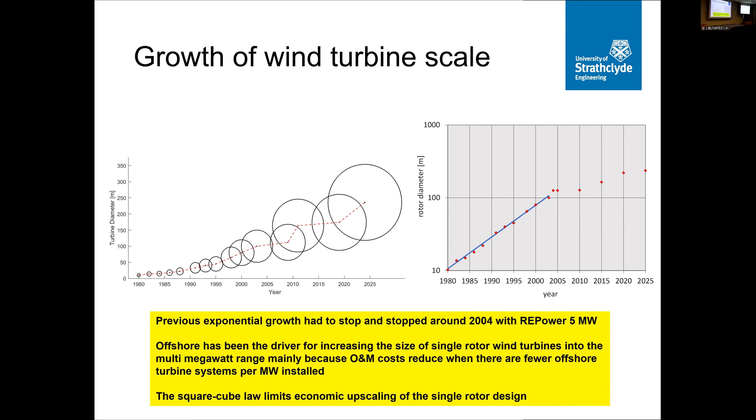For most European machines on land, tip speeds were restricted around 60, 65 meters per second. Then with the advent of variable speed technology, which could manage noise by reducing speed in certain wind conditions, somewhat higher tip speeds, 70 or 80 meters per second, were employed.

The faster the machine runs, the lower the torque at a given power, and the less weight and cost in the drivetrain. We see a pattern with offshore machines where tip speeds have increased into the 90 meters per second range and perhaps a little above. This is advantageous for the economics of the turbine. It could be pushed further to values like 120 meters per second, but I think there is still some concern about blade erosion and the implications for maintenance.

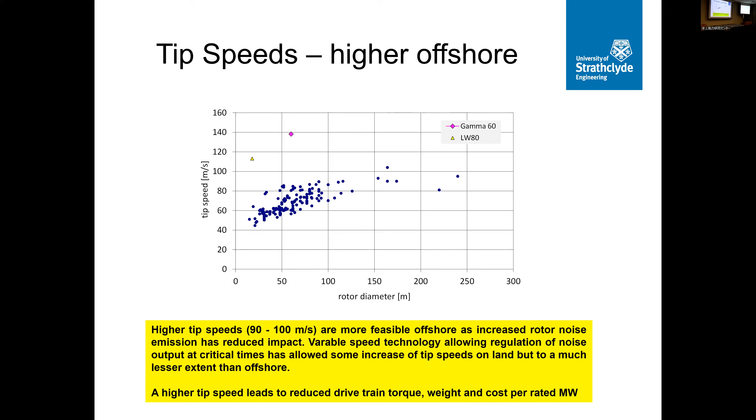Another pattern in offshore machines is reduced power density, which is equivalent to a relatively larger diameter in relation to the rated power of the machine. The whole logic of how much power you extract from a machine of a given size is really about the ratio of the value of energy from the rotor and the costs incurred by rotor loads, and in particular by the electrical transmission system. The cost of the transmission system is much greater offshore, and the cost of rotors in terms of lifetime cost is rather less, and this justifies larger rotors. So we see an average power density on land of around 400 watts per meter squared, reducing offshore to values like 350, 320 - a general pattern for offshore turbines.

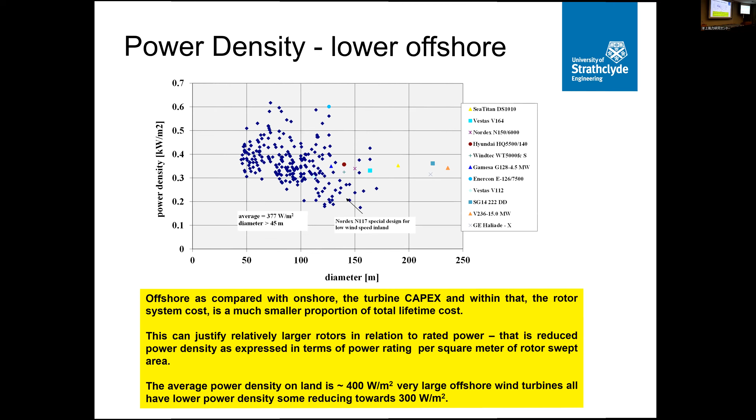Aerodynamic research has been active since the beginning of the modern wind industry in 1980 and continues. It might have been thought that with mature industries in aircraft, both civil and military, there would be enough done on airfoil development. But in fact, the specification of wind turbines is different.

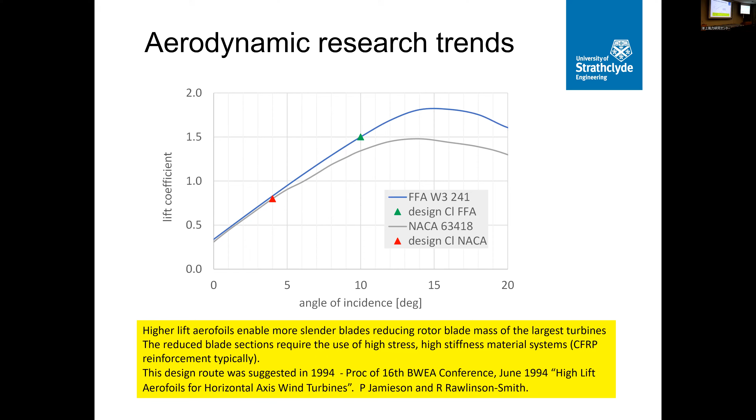Stall is sometimes useful in limiting loads. For lighter, very large rotors, sections with higher lift are advantageous, to avoid the rotor blade sections being too big near the root. So in summary, the development of aerofoil sections has been active and remains active in research.

If you look at the largest machines around, the permanent magnet design of generator seems to be quite dominant.

There have been considerable concerns in recent years about the supply of rare earth magnets. And some manufacturers like Siemens, although they use permanent magnets in their biggest machines, are avoiding them in smaller machines. And even a Chinese manufacturer like Goldwind is considering systems with gearing, which is not usually a high-speed generator, but systems that reduce the quantity of magnet material.

There's also competition with electric vehicles for some of the components of the rare earth magnets, such as dysprosium, which is useful for the cooling of the generator.

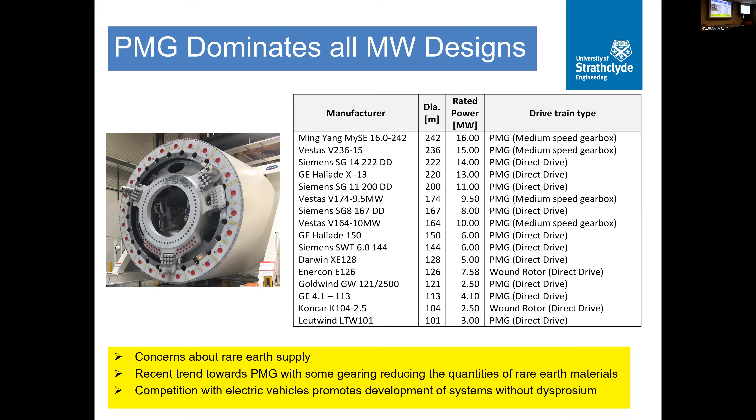The attraction of the permanent magnet design is in the comparative simplicity of the generator, avoiding geared systems in the direct drive solutions. This is a particularly innovative solution which achieves the gearing magnetically without lubrication.

And we have a conflict here because these designs with the permanent magnets are among the most efficient, especially at lower part loads. At the same time, there's concern about permanent magnet supply worldwide, especially because of the Chinese stranglehold on the market.

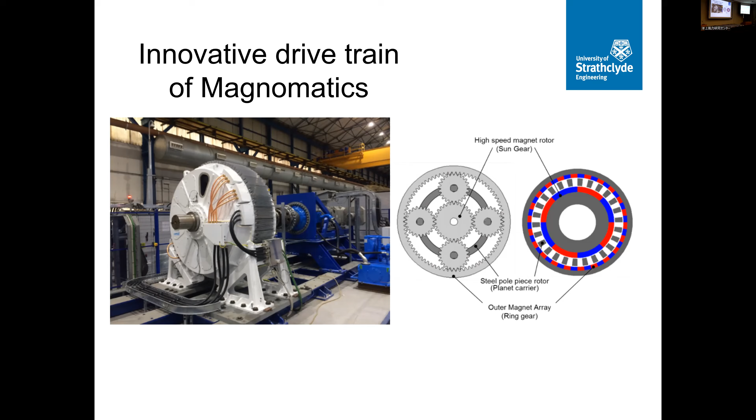There are a huge number of innovative wind turbine designs. My connection with Kyushu University, which has been over 10 years, started with an invitation from Professor Yoshida, and very quickly I realized we had a lot of common interest with the research that Professor Ohya was conducting. The wind lens ducted rotor developed at Kyushu is, in my opinion, one of the most effective designs. I think the combination of an expansion area and a brim leads to a compact rotor, and I believe this is the best way to go with that type of design.

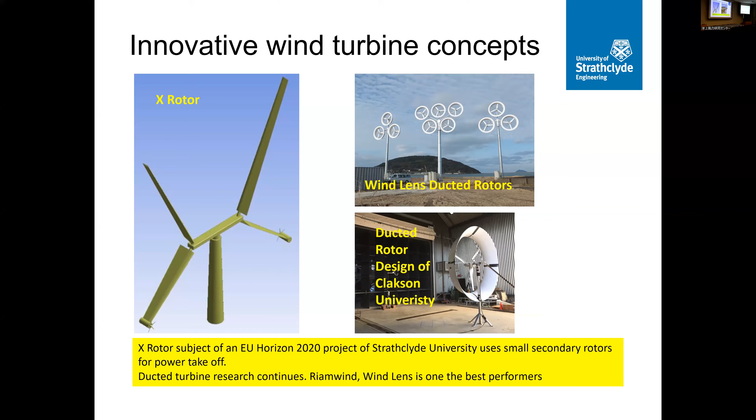If you look at the research papers published today, it's very obvious that over the past 20 years, no surprise to anyone, there has been very strong growth of interest in offshore. And offshore, although it's still a relatively small proportion of the total installed capacity in the world, is the area of greatest growth in research. And within offshore, floating systems is also showing the greatest growth. So this reinforces the relevance of the work that is going to be undertaken at the new center in Kyushu.

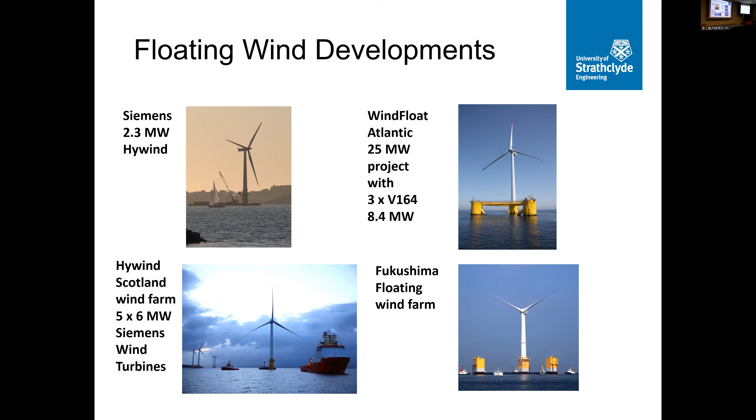We now have floating projects and floating wind farms. I won't say much about this, especially at Fukushima - you will know a great deal more than I do. But the development is now seriously underway.

For that technology, I draw attention to some key areas in the floater design. The semi-submersible design is definitely dominating the market at the moment, but I believe the key to the most effective design is to integrate the floater with the wind turbine structure.

And also there are new concepts for floaters which involve suspending the ballast mass rather than directly filling elements of the structure. I'm not an expert in hydrodynamics, but it seems to me that this is a very active research area and is going to be important for getting costs down.

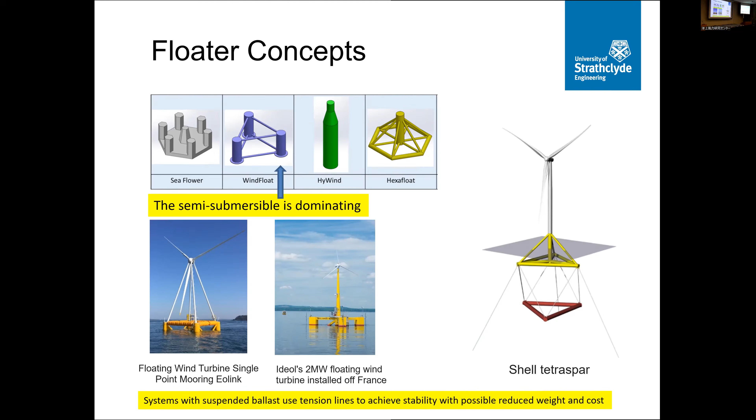What I would like to emphasize is that when I started, especially looking at innovation for the UK government in the 1990s, rather than simply look at some ideas and try and compare them, I asked myself the question: what is the basis of effective innovation? What is the logic of systems that will really reduce the cost of energy? Two things were very noticeable. One, that there's a mismatch between energy production, which comes in moderate and light winds predominantly, and the cost in a wind turbine, which is driven by defending the turbine in the higher wind speeds and in extreme wind speeds, in the case of Japan, typhoon conditions.

The other area is a simple observation that the value of a wind turbine is in the area exposed to the wind - that's the source of the energy. Everything you do to support that area and to extract the power is producing cost. So the ratio of area to cost is a key parameter, and increasing that is a design principle for innovation.

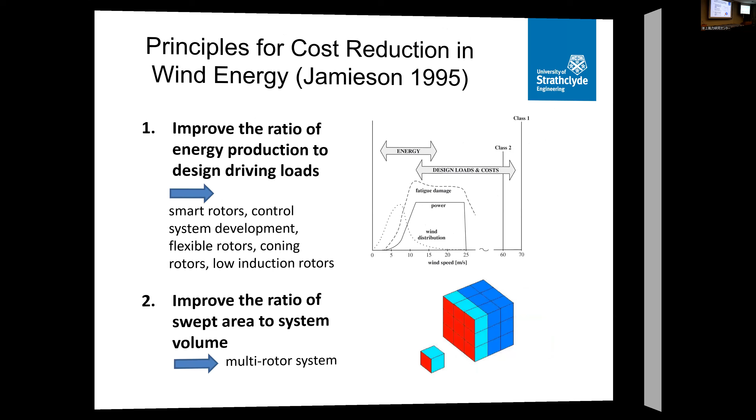This led me to the multi-rotor system. You can have systems with a few turbines, like the Aerodyn turbine, which the twin turbines are producing 15 megawatts. It's a very nice design, and the integration of the structure for the twin turbines with the floater leads to a light and promising design, promising to be low cost.

The systems with a large number of rotors are different in character. They really exploit the benefit of having a large area but a small volume of rotor nacelle assembly materials and cost. So there are huge CAPEX savings in what is normally a major cost element of the wind turbine, the rotor and the drivetrain. But perhaps even more important is the possibility for standardization.

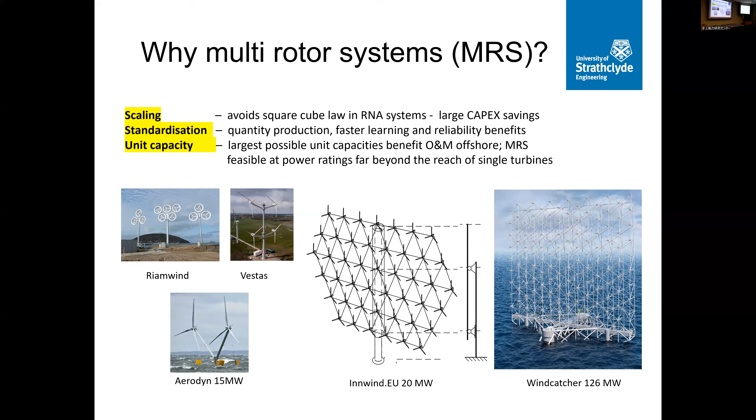It's conceived of as a floating system. I was not directly involved in the design of this system, but I was involved in design review and evaluation and guidance on the design.

There are two options basically for the yawing of the thing. One is to have a turret, a moored turret, and the system can rotate around it. The other possibility is that it can simply yaw, taking up a downwind attitude by drift on catenary lines. This means that you avoid the need for any specific and potentially expensive mechanism to enable the yawing of the system.

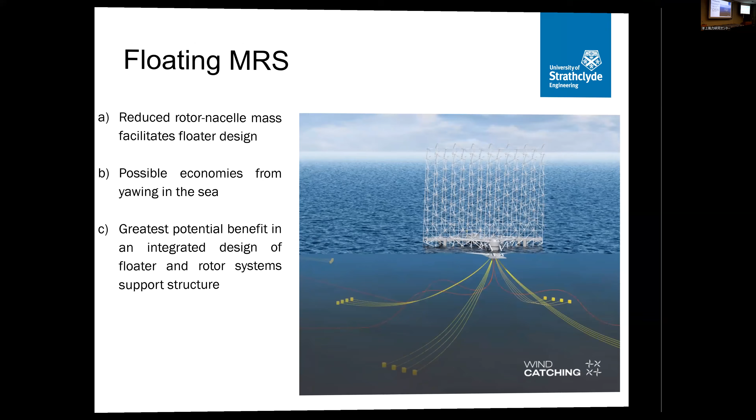I have recently been involved with the European team on the development of a multi-rotor system based on vertical turbines.

I don't have time to explain all the logic of this, but the vertical turbines, which are normally less efficient than horizontal turbines, in a blockage situation side by side can generate extra power. If they're high aspect ratio with long blades, you mitigate tip loss. They're naturally supported in a rectangular structure, which is good for maintenance and so forth.

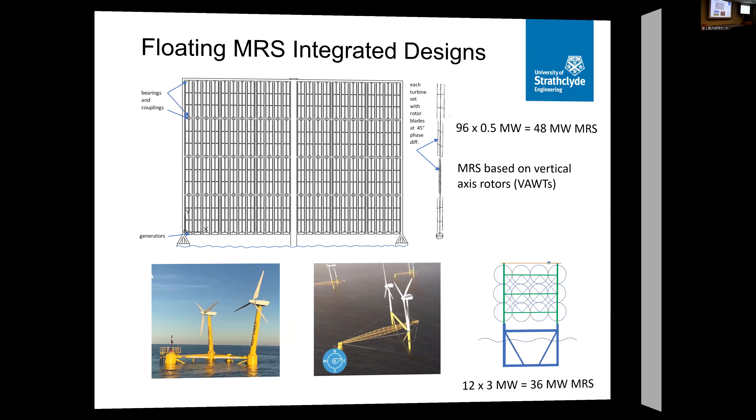If there is any issue regarding conventional turbines and particularly multi-rotor turbines offshore, the one above all that is of critical importance is the operation and maintenance. It's a higher proportion of costs offshore.

And particularly at Strathclyde University, for the multi-rotors, we have been developing detailed modelling. And I have done some work for leading manufacturers such as Siemens, and it appears the key is the management of minor faults.

In multi-rotor systems with small turbines, you can have efficient systems for handling the turbines, avoiding the use of jack-up vessels. But it's very important with a lot of turbines that you can deal efficiently with minor faults, or avoid them by introducing extra redundancies or more reliable components.

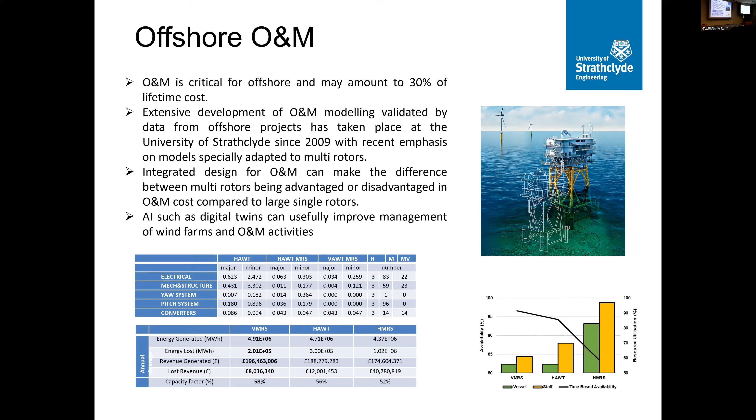There are now a number of projects looking at offshore hydrogen production. There seems to be some consensus that the optimum solution will be to produce the hydrogen locally offshore rather than transmit electricity to electrolyzers based on land.

The projects in Europe are very naturally looking at the detailed design of electrolyzers and all the necessary equipment, and how costs can be reduced.

I would add to that a simple observation that if you can decouple the production of energy from electricity demand by having a storage medium such as hydrogen, then the same amount of energy can be produced by a much smaller generator with a larger rotor.

We see here a large number of institutions, some involved in prototype manufacture, some in research around the world looking at airborne systems.

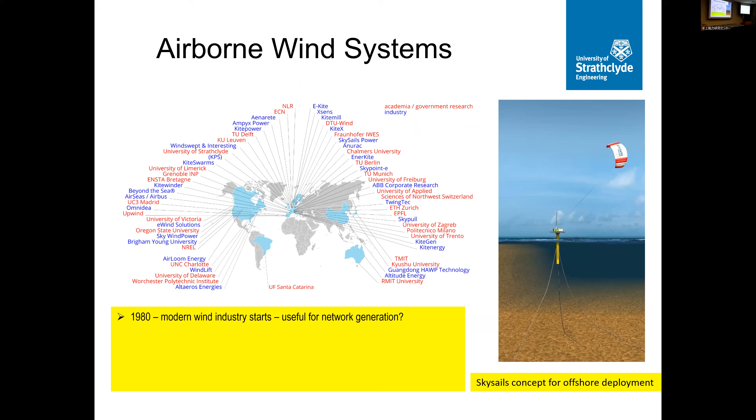I would ask you to cast your mind back. When I started in 1980, it was scarcely credible that wind turbines would be useful for an electrical network. By 1990, land-based technology was established, but offshore was considered far too expensive. By 2000, offshore was in progress. Floating was still considered problematic and too expensive. And so on the story goes.

Floating is now established. There are advantages in available resource areas and in not being tied to specific seabed conditions. And floating wind farms are now established.

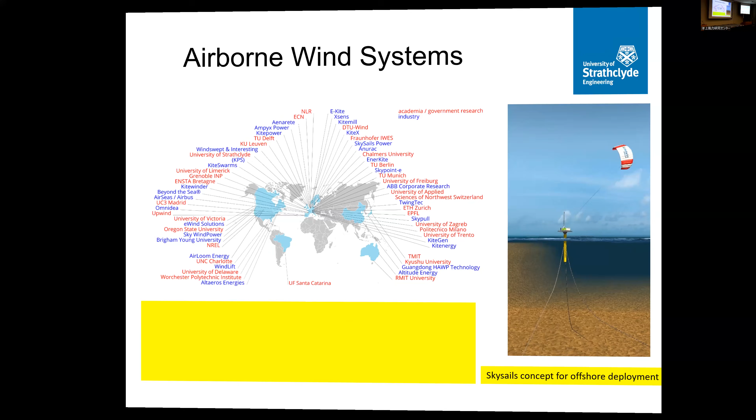Airborne prototypes are operational. Airborne takes me back, I'll just very quickly get back to this slide. You have the opportunity to take the machine out of the air if severe storm conditions are approaching. This means that you're much improving this mismatch between the design loads and cost and the energy production. You also get access to higher wind speeds at moderate altitudes of 1,000 meters or so.

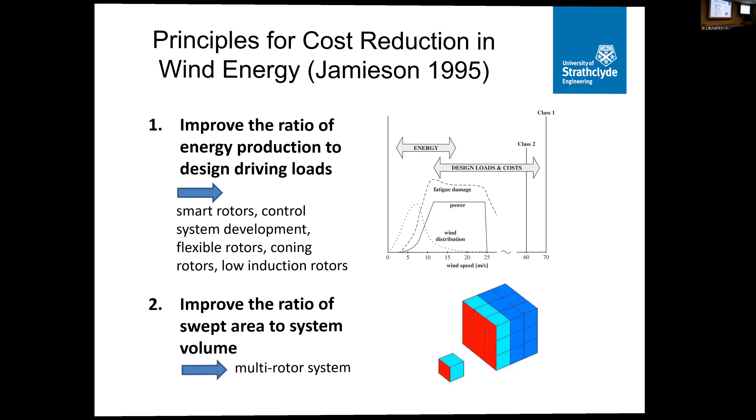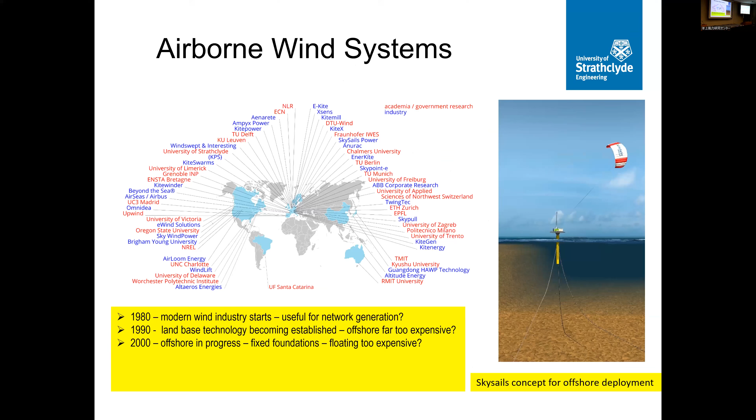So it's another interesting area for offshore research. So to conclude, it's very obvious that offshore dominates present wind energy research and that floating offshore is the fastest growing area.

It's now all about offshore increasing reliability and getting costs down, and especially in the integration of floater and support structure, I would suggest.

I've indicated the promise of multi-rotor systems for upscaling the large unit capacities, and would emphasize that it's not simply a matter of modeling O&M and getting the logistics right. It is designing the system from the outset in terms of both margins for reliability and O&M, how you're going to handle components and so on. And there's plenty of scope and need for further research there.

So I hope this is going to be a useful outline for you, and thank you very much for your attention.